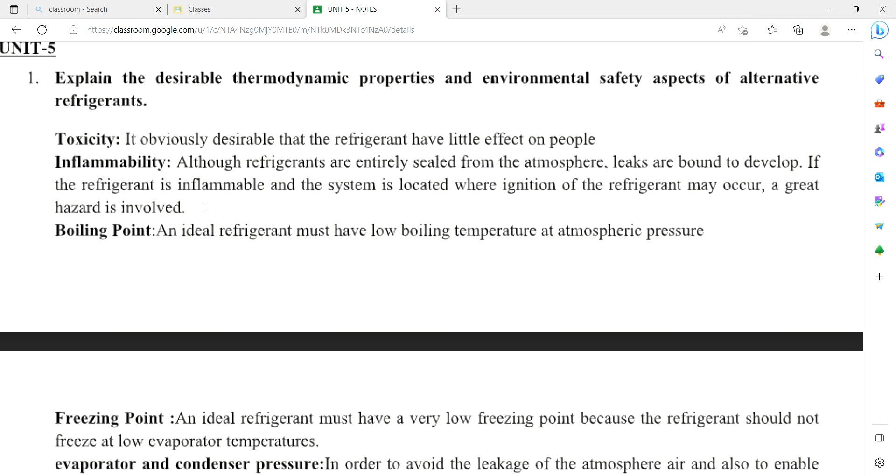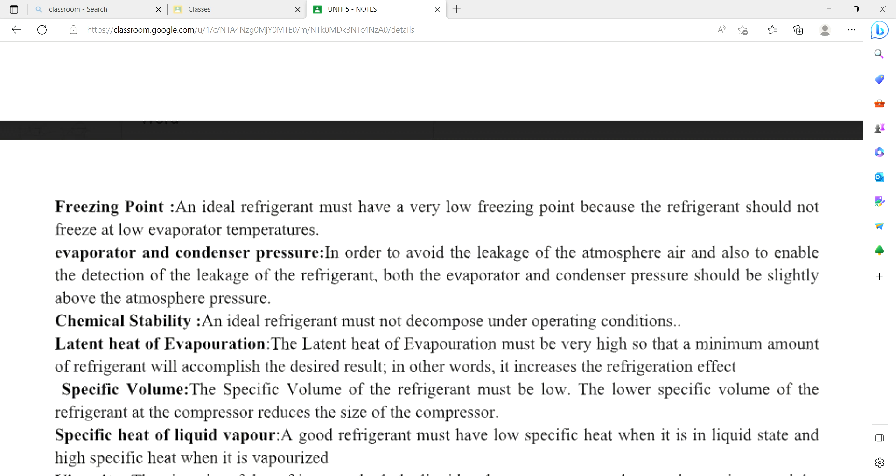Boiling point: an ideal refrigerant must have a low boiling temperature at atmospheric pressure. Freezing point: it must have a very low freezing point because the refrigerant should not freeze at low evaporator temperatures. Evaporator and condenser pressure should be slightly above atmospheric pressure, in order to avoid leakage of atmospheric air and to enable detection of refrigerant leakage.

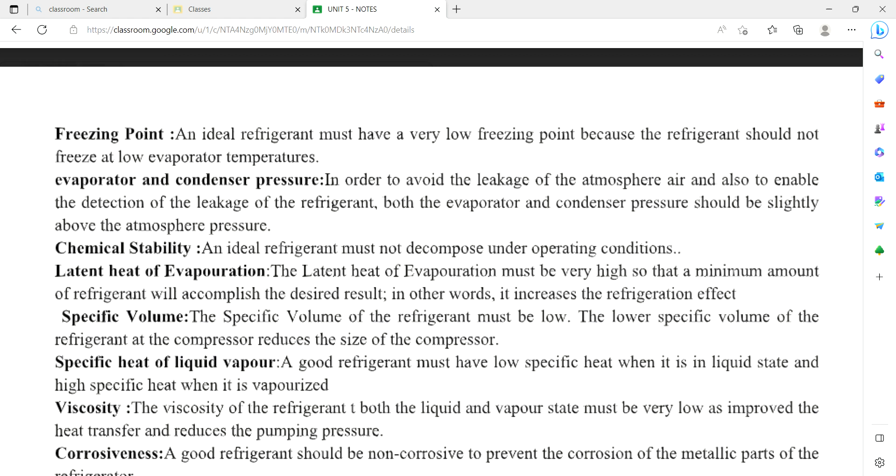Chemical stability: an ideal refrigerant must not decompose under operating conditions. Latent heat of evaporation must be very high so that a minimum amount of refrigerant will accomplish the desired result; in other words, it increases the refrigeration effect.

Specific volume: the specific volume of the refrigerant must be low. A lower specific volume of the refrigerant at the compressor reduces the size of the compressor.

Specific heat of liquid and vapor: a good refrigerant must have low specific heat when in liquid state and high specific heat when vaporized. Viscosity: the viscosity of the refrigerant, both in liquid and vapor state, must be very low, as this improves heat transfer and reduces pumping pressure.

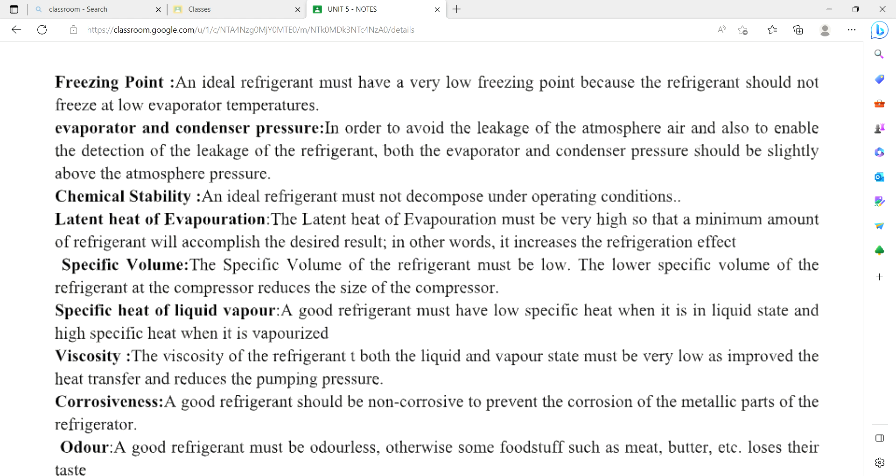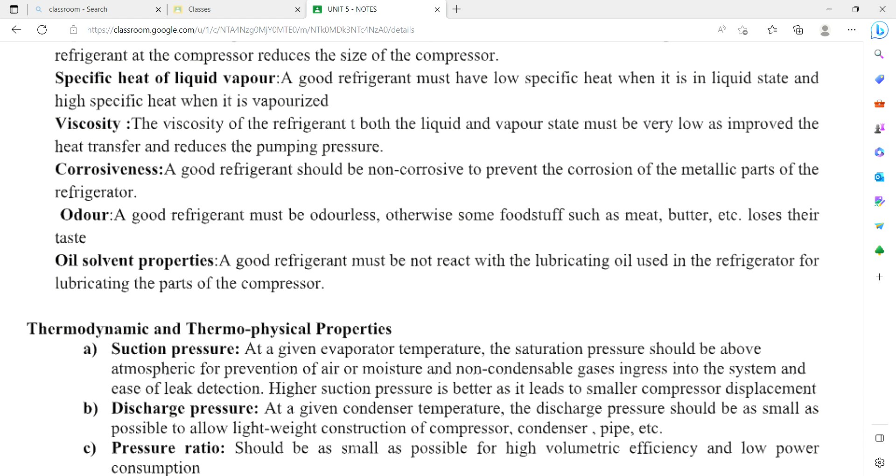Corrosiveness: a good refrigerant should be non-corrosive to prevent corrosion of the metallic parts of the refrigerator. Odor: a good refrigerant must be odorless, otherwise some foodstuffs such as meat, butter, etc. lose their taste. Oil solvent properties: a good refrigerant must not react with the lubricating oil used for lubricating the parts of the compressor.

Thermodynamic and thermophysical properties. Suction pressure: at a given evaporator temperature, the saturated pressure should be above atmospheric to prevent ingress of air, moisture, or non-condensable gases into the system, and to aid leak detection. Higher suction pressure is better as it leads to smaller compressor displacement.

Discharge pressure: at a given condenser temperature, the discharge pressure should be as small as possible to allow lightweight construction of compressor, condenser, pipe, etc. The pressure ratio should be as small as possible for high volumetric efficiency and low power consumption.

Latent heat of vaporization should be as large as possible so that the required mass flow rate per unit cooling capacity will be small.

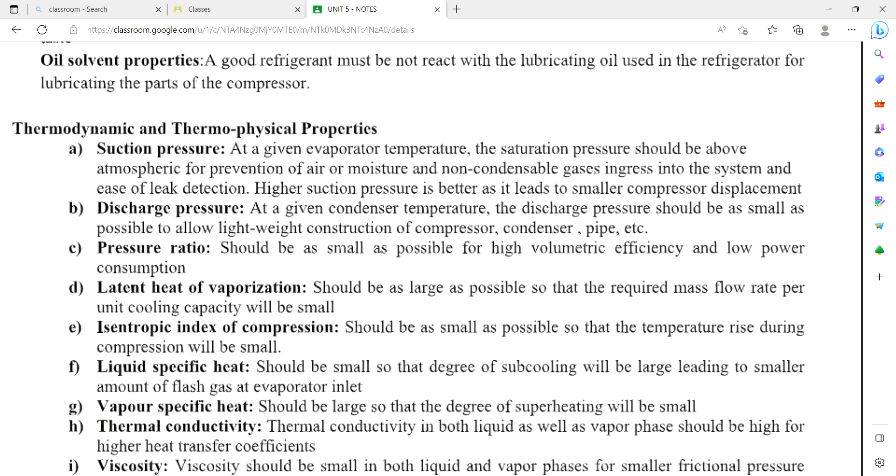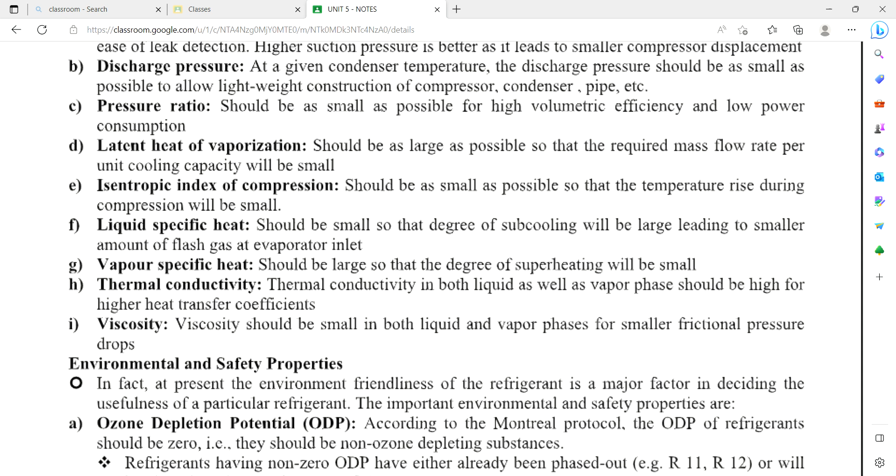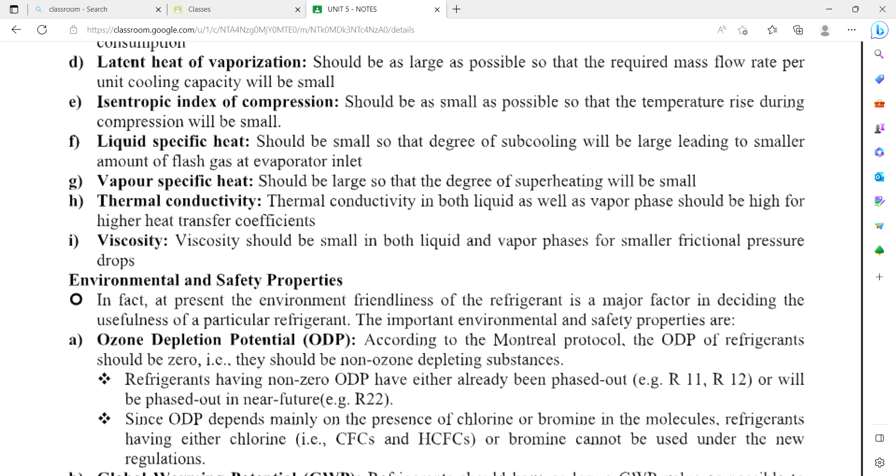Isentropic index of compression should be as small as possible so that the temperature rise during compression will be small. Liquid specific heat should be small so that the degree of subcooling will be large, leading to a smaller amount of flash gas at the evaporator inlet. Vapor specific heat should be large so that the degree of superheating will be small.

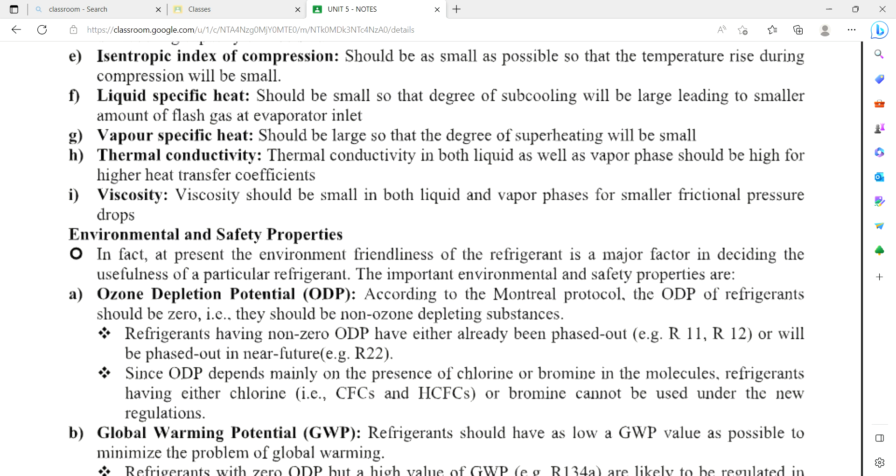Thermal conductivity in both liquid and vapor phase should be high for higher heat transfer. Viscosity should be small in both liquid and vapor phase for smaller frictional pressure drops.

Environmental and safety properties. In fact, at present, the environmental friendliness of the refrigerant is a major factor in deciding the usefulness of a particular refrigerant. The important environmental and safety properties are as follows.

Ozone depletion potential (ODP): according to the Montreal Protocol, the ODP of a refrigerant should be zero, that is, they should be a non-ozone depleting substance. Refrigerants having non-zero ODP have either already been phased out or will be phased out in the near future. Since ODP depends mainly on the presence of chlorine or bromine in the molecule, a refrigerant having either chlorine or bromine cannot be used under the new regulation.

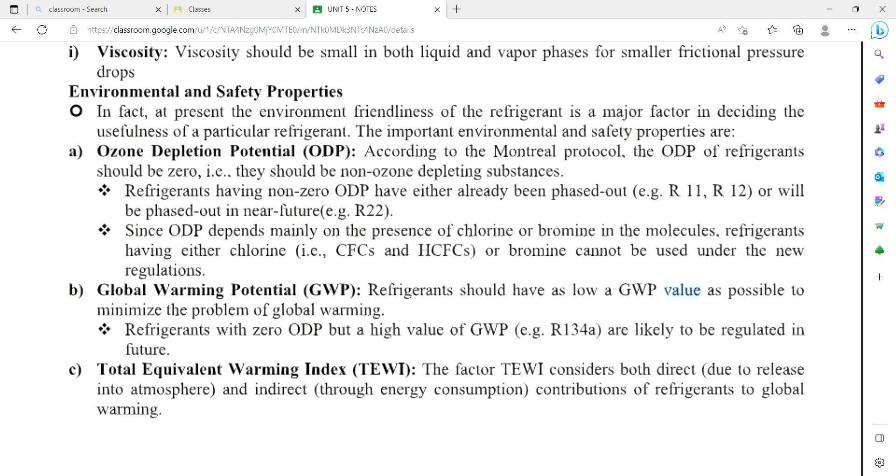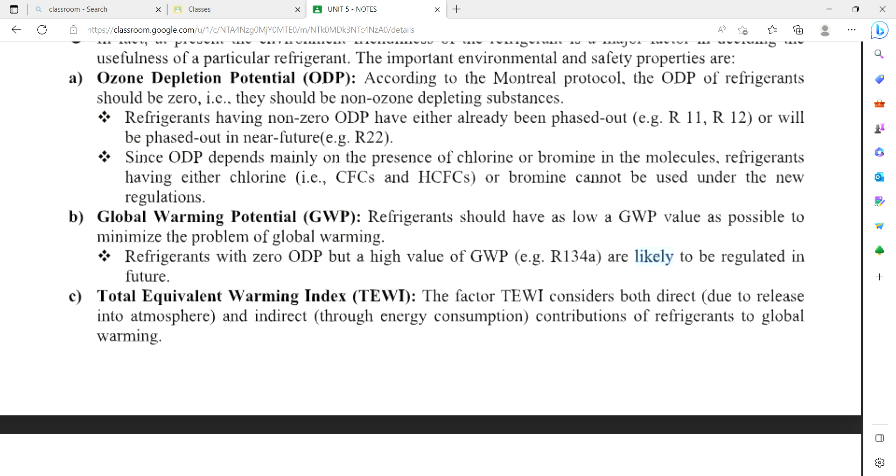Global warming potential: a refrigerant should have as low a GWP value as possible to minimize the problem of global warming. Refrigerants with zero ODP but a high GWP value are likely to be regulated in the future. Total equivalent warming index (TEWI) considers both the direct contribution due to release into the atmosphere and the indirect contribution through energy consumption to global warming. Naturally, a refrigerant with as low a TEWI value as possible is preferable from a global warming point of view.

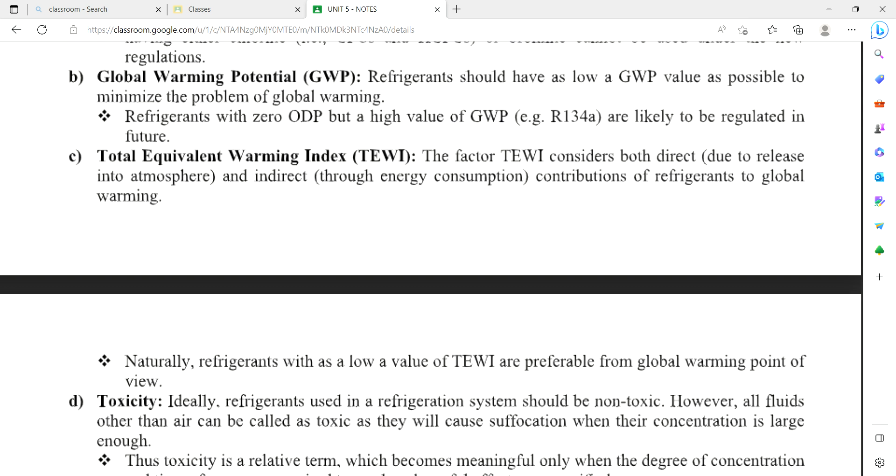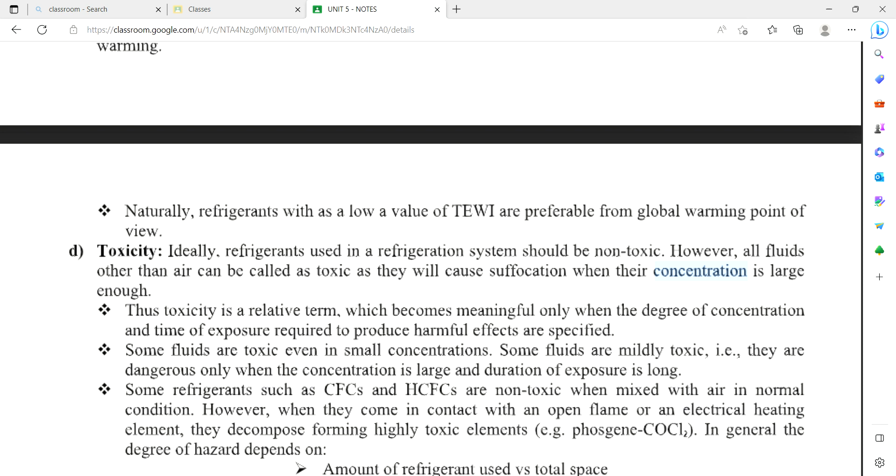Toxicity: ideally, a refrigerant used in a refrigeration system should be non-toxic. However, all fluids other than air can be called toxic as they will cause suffocation when their concentration is large enough. Thus, toxicity is a relative term which becomes meaningful only when the degree of concentration and time of exposure required to produce harmful effects are specified.

Some fluids are toxic even in small concentrations. Some fluids are mildly toxic; they are dangerous only when the concentration is large and the duration of exposure is long. Some refrigerants such as CFCs and HCFCs are not toxic when mixed with air under normal conditions. However, when they come in contact with an open flame or electric heating element, they decompose, forming highly toxic elements.

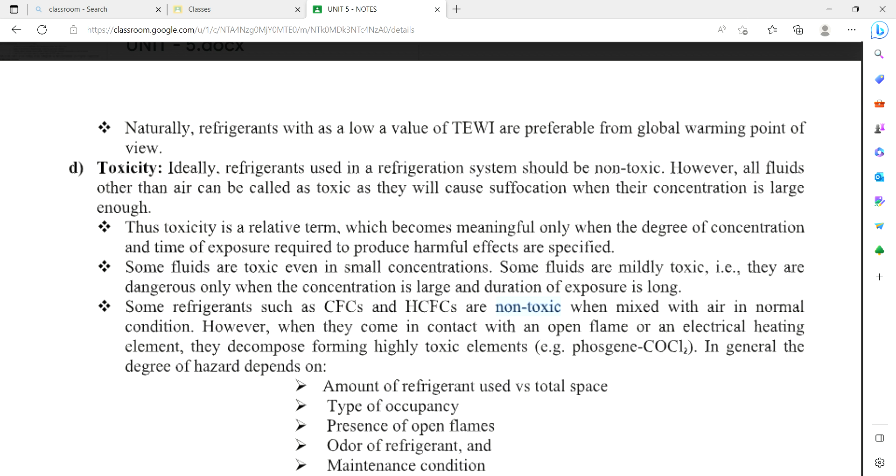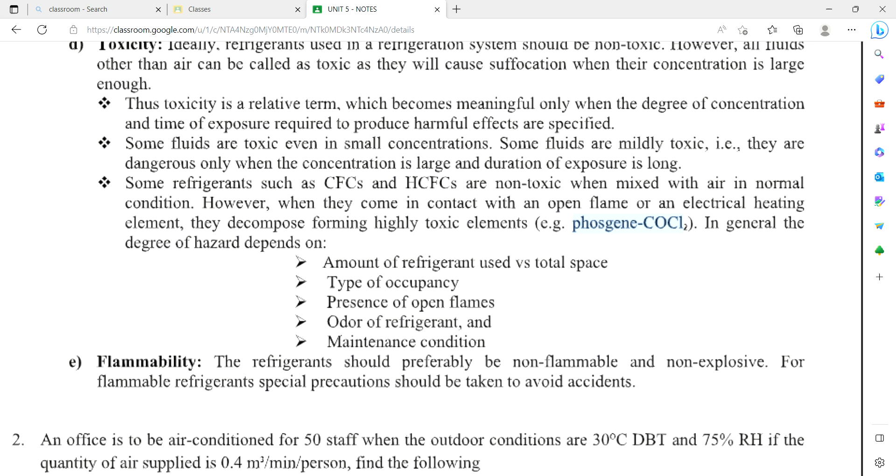In general, the degree of hazard depends on the amount of refrigerant used versus total space, type of occupancy, presence of open flames, odor of refrigerant, and maintenance conditions. Flammability: the refrigerant should preferably be non-flammable and non-explosive. For flammable refrigerants, special precautions should be taken to avoid accidents.